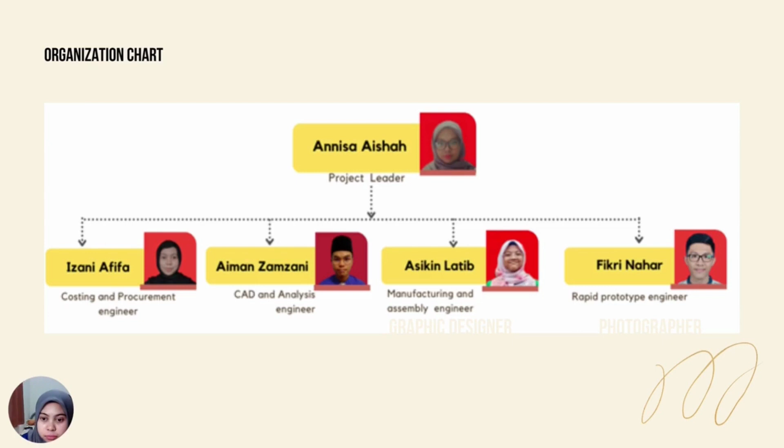And the time plan for our project is: meeting for profile company we're doing on week 5, discussion for project background and job distribution on week 6, design idea and process final selection on week 7, product development and evaluation on function and cost.

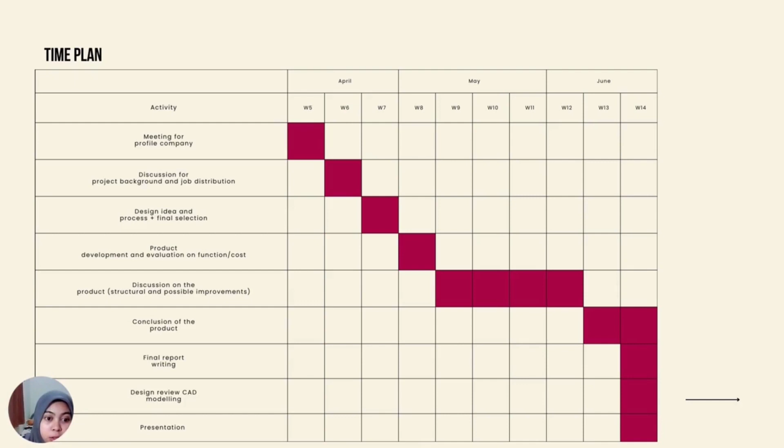For chapter 1, which is introduction and background theory, our project title is Enlil Wind Turbine. What is Enlil? Enlil is the first vertical smart wind turbine. It has been designed to both harvest the energy from the natural wind as well as those created by passing vehicles.

Objective of the project: the main objective of this project is to gain power from wind and reduce the amount of electricity generated from fossil fuel, resulting in lower total air pollution and carbon dioxide emission. Scope of the project focus: this project is comprised of improving the overall design and performance of the wind turbine, and making the best structure and ability of each component assembly.

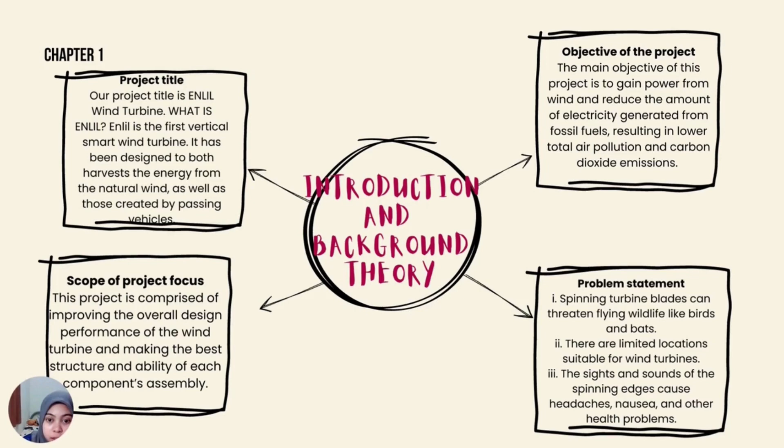Problem statement. First, spinning turbine blades can threaten flying wildlife like birds and bats. Second, there are limited locations suitable for wind turbines. Third, the sight and sound of the spinning blades cause headache, nausea, and other health problems.

Next, team member job scope. Annisa Aishah binti Roziman was planning the project, giving instructions to the team and making the project's budget. Nurul Izani Afifa managed the cost, schedule and quality.

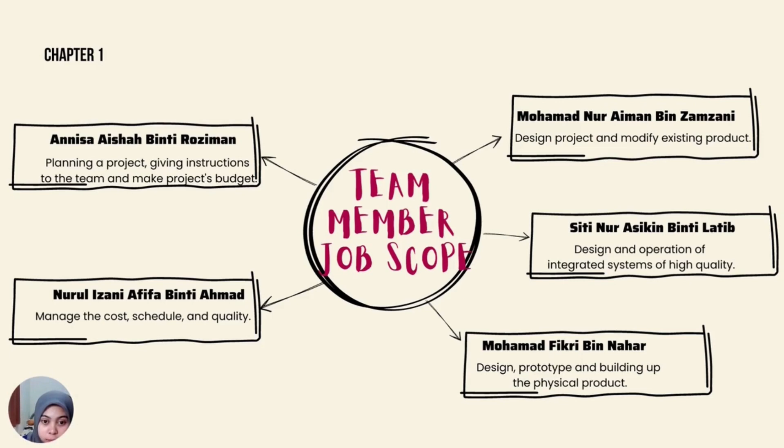Mohamad Nur Aiman bin Zamzani designed, projected and modified existing product. Siti Nur Asikin binti Latib handled design and operation of the integrated system of high quality. And lastly, Mohamad Fikri bin Nahar designed, prototyped and built up the physical product.

Explanation of the device. Wind turbines operate on a straightforward premise. A wind turbine rotates, utilizing wind power the opposite way a fan uses power to create wind. The propeller-like blades of a turbine are turned by wind around a rotor, which spins a generator.

The generator generates power. Enlil wind turbines are designed to gather energy from both natural wind and wind generated by passing automobiles. The aerodynamic force of the rotor blades, which are omnidirectional, converts wind energy into electricity in a wind turbine.

They don't need to be angled into the wind to work. The rotor is connected to the generator via a shaft and a set of gears, which speed up the rotation and allow the generator to be physically smaller. The conversion of aerodynamic force to generator rotation generates power.

Enlil is a vertical turbine that uses the dynamics of a modern city to harness one of the most important renewable energy sources, wind power. It is meant to capture the quick and continuous flow of traffic on a roadway in addition to the popularly recognized turbine.

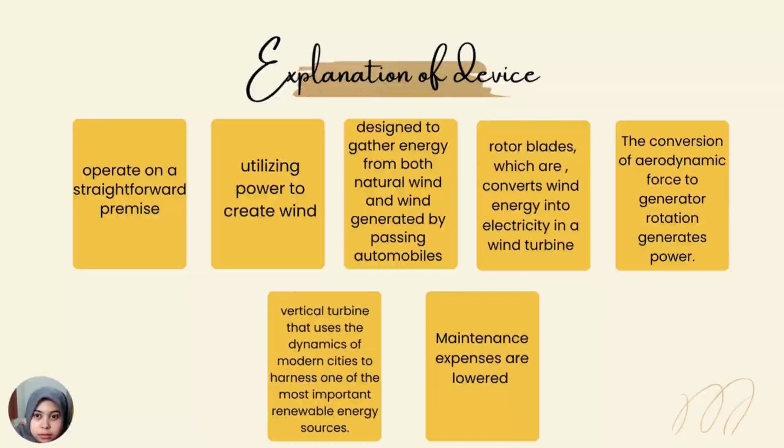The software that I use to design these components is SolidWorks. From the slide, you will see all of the components that we use in our product. Now I will describe our product components as well as their functions.

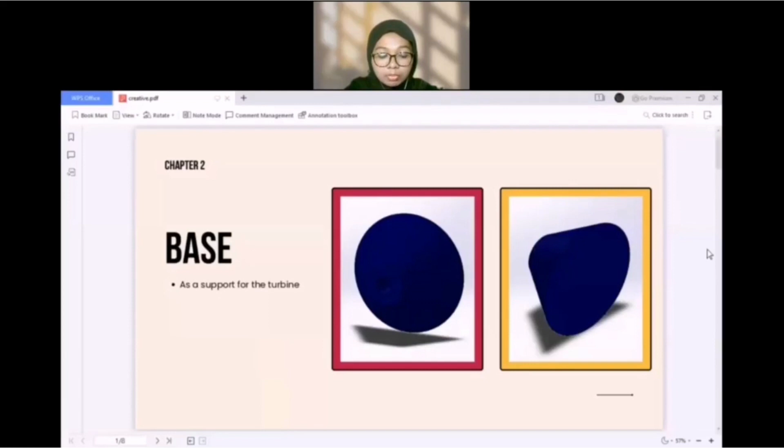The first component is the base. Bases were made to support all of the components of our wind turbine. All of the main components of the turbine will be located at the base.

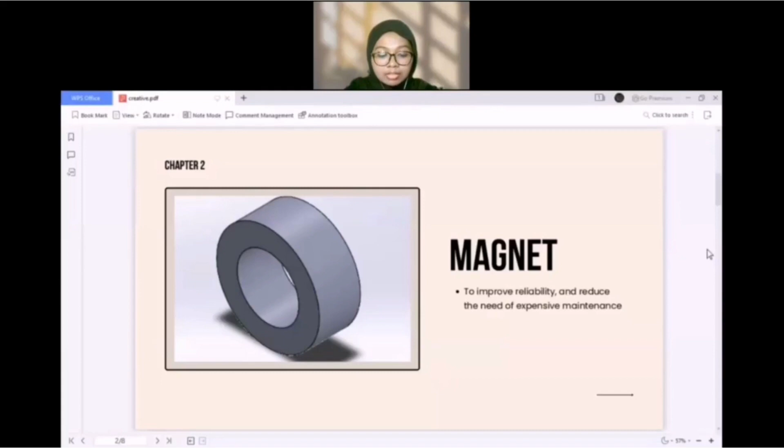Next is magnet. Magnet is made to improve reliability and reduce the need for expensive and ongoing maintenance. Magnet will also eliminate mechanical vibration as well as reducing noise.

The third component is rotor blades. Its function is to provide lift as the blades rotate. It will absorb the kinetic power of the wind and convert the energy to rotary motion around a central hub.

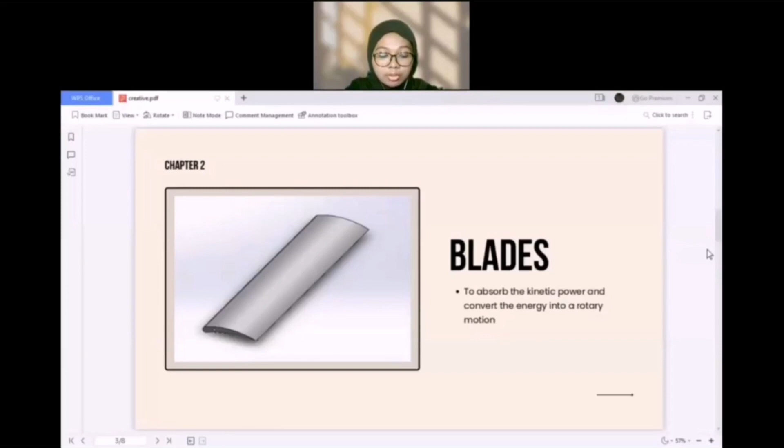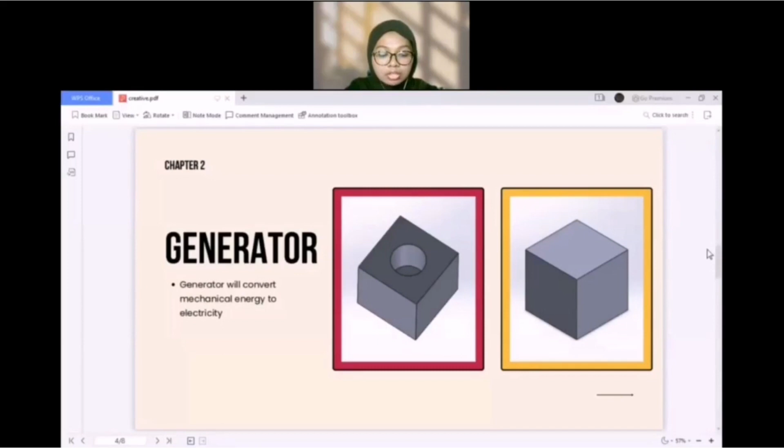Next is the generator that will convert mechanical energy to electricity. The generator is housed at the top of a tower just behind the turbine rotor hub.

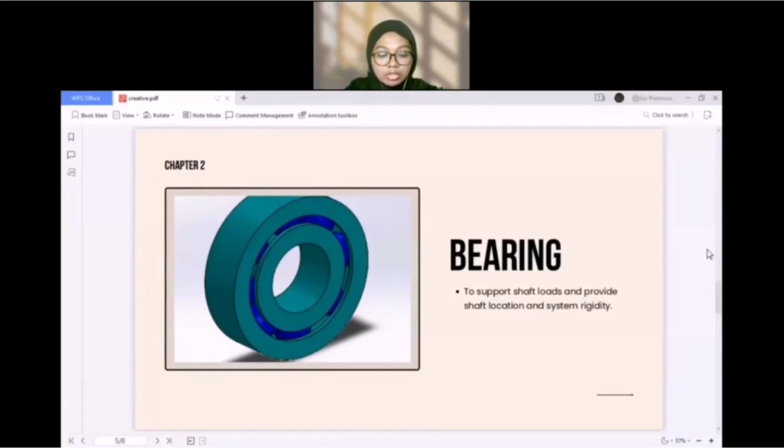The fifth component is bearing. Bearing is made to support shaft loads and reduce friction with rolling elements. Apart from bearing, we also made a bearing bracket, which supports the weight of the rotor. It also allows the turbine to spin freely and transmit torque to the generator.

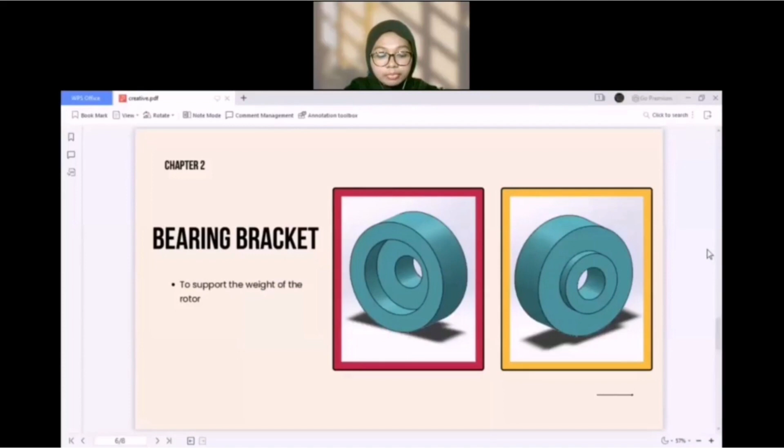Then we also have disc, which is to determine the optimum performance in the absence of blade drag.

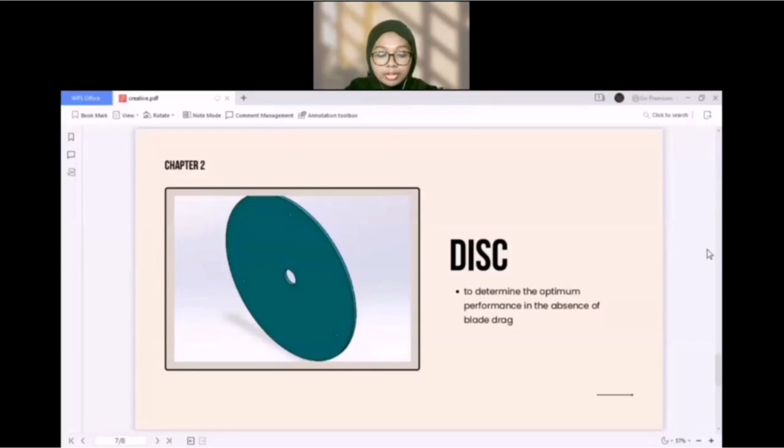The last component is shaft. Shaft is the section that is rotated by the turbine blades. The shaft is then linked to the generator located at the main housing.

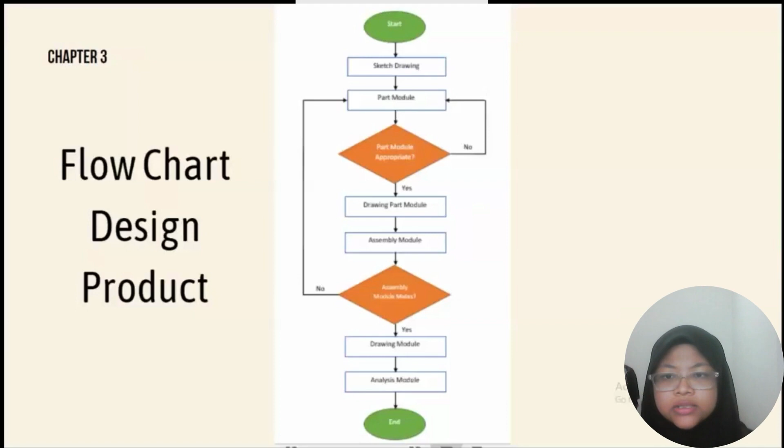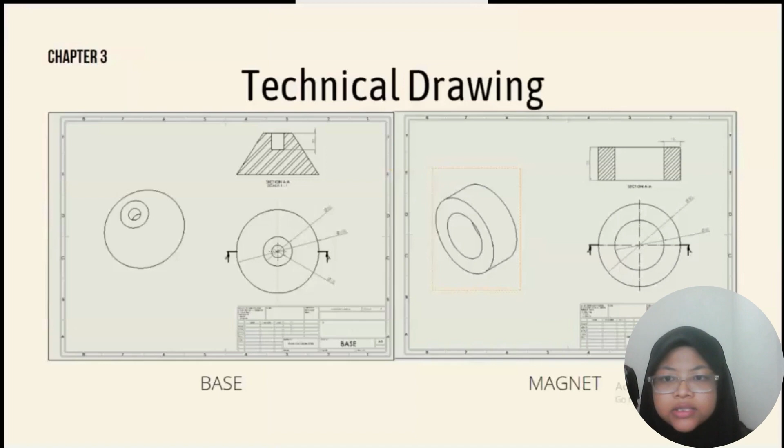Next is about the technical drawing and dimensions for each part. As you can see on the slide, there's the technical drawing for each part of the wind turbine, such as base, magnet, blade, generator, bearing bracket, disc and shaft.

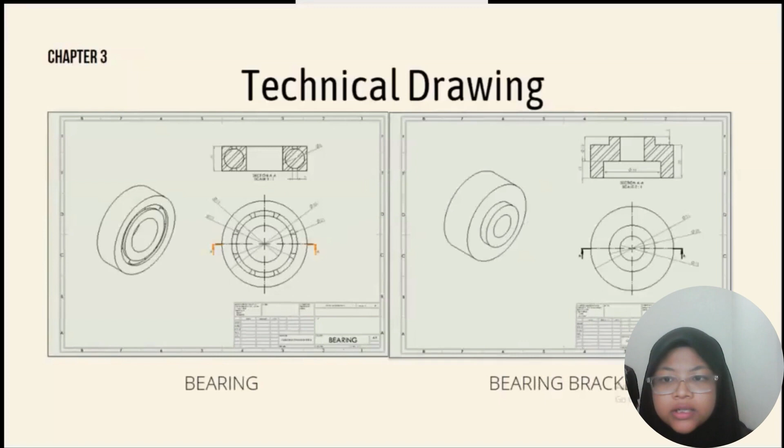Each drawing includes the dimension and the material of each part, which you can see on the report. Next is the drawing for the assembly, with material selection and bill of material.

On the slide you can see I already put the number for each of the parts. Number one we have base and the material is plain carbon steel. And for the bearing we set it as chrome stainless steel.

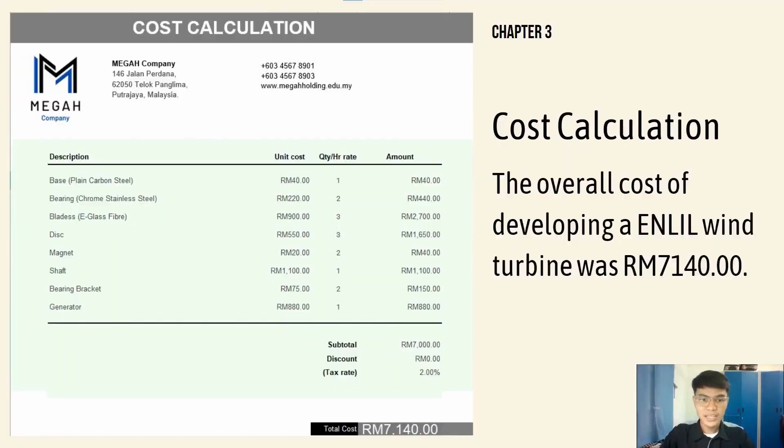I'm going to discuss the structural analysis result. After doing the simulation in SolidWorks, one of the structural analysis results we got is von Mises. The maximum von Mises value is 1.74 times 10 to the power of 6 Newton over meter squared, found at the center of the top and bottom disc.

This indicates that the middle part of each disc experiences a higher level of stress than other parts, due to the torque applied, which is caused by the wind force.

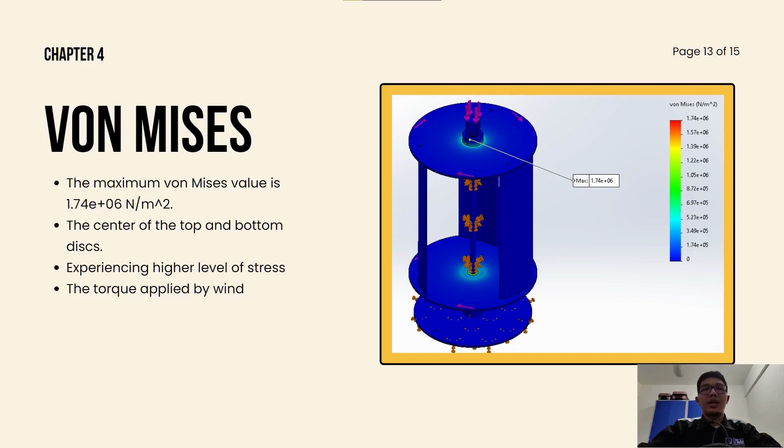The second structural analysis we did is the displacement. The displacement can be shown by the colored region when simulating the assembly part. The red region indicates the maximum displacement value of 0.001294 mm from the initial state, which is experienced by the parts.

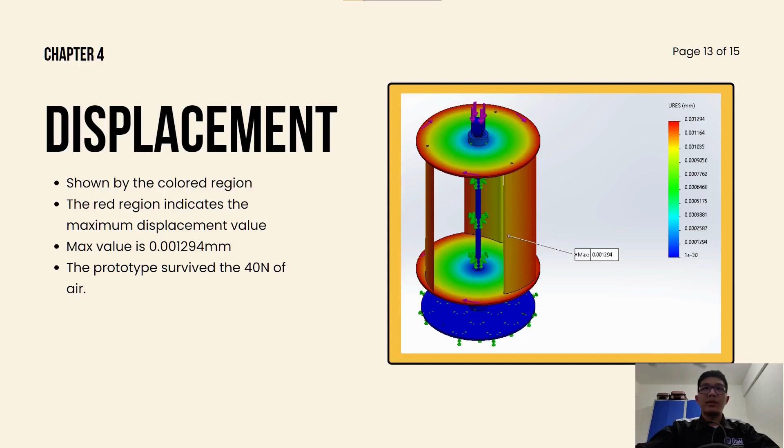As shown by the simulation, the prototype survived the 40 Newton of air. For the third part of the structural analysis, we look into the deformation.

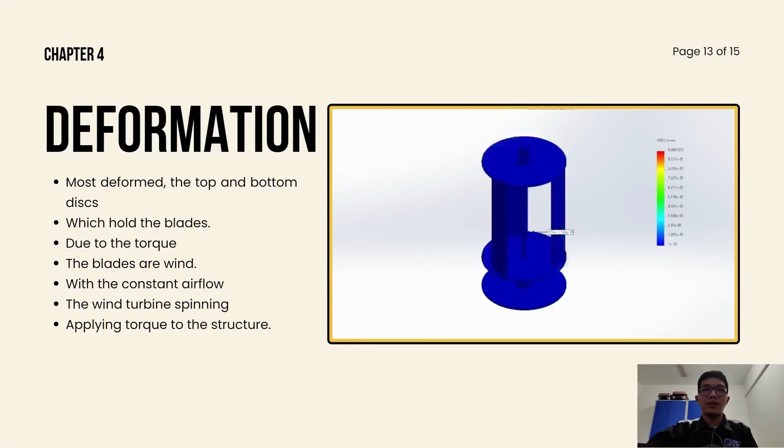As shown by the video, the parts that are most deformed are the top and bottom discs, which hold the blades. This is due to the torque applied when the blades are pushed by the kinetic energy of the wind. With constant airflow and the help of bearings, the wind turbine keeps spinning while applying torque on the structure.

After we finished the structural analysis, we calculated the factor of safety. The part that sustains the most stress is the disc, so we find the yield stress of the disc, which is 240 megapascal.

By using the formula factor of safety equals yield stress over max von Mises stress, we calculated and got the factor of safety, which is 137.93. In conclusion, the material will not fail even after applying the wind force of 40 Newton.

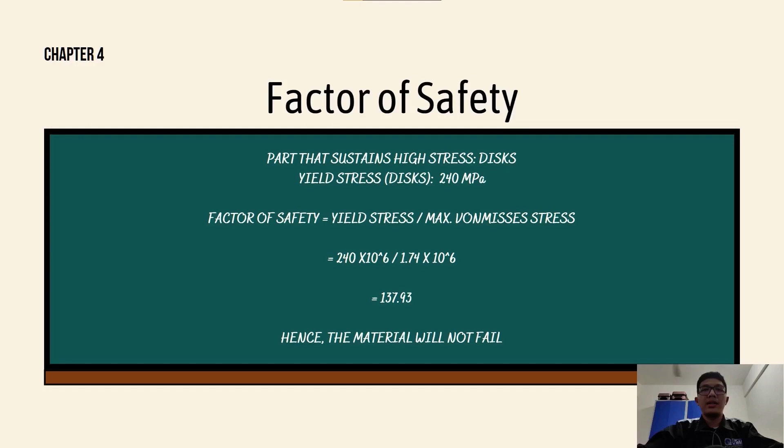Next, I will proceed to techniques to improve design failure during analysis. The first one is fixtures on the most bottom disc. Second, using the predefined material. And the last one is apply force only to the necessary part.

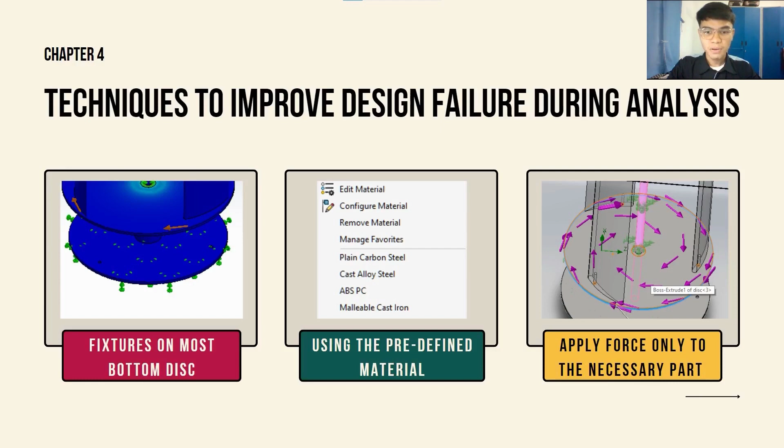Next, I will discuss ideas to improve the device. The Enlil wind turbine project that was completed contains flaws and weaknesses of its own. As a result, various suggestions for improving this project have been made.

The first idea to improve the device is to thicken the disc. The density of a disc increases as it becomes thicker, so the disc has a stronger resistance to torque. As a result, more torque can be accommodated.

Next, you should utilize a material with a high elastic modulus. When a material has a higher percentage of elastic modulus, it has a lower chance of deforming.

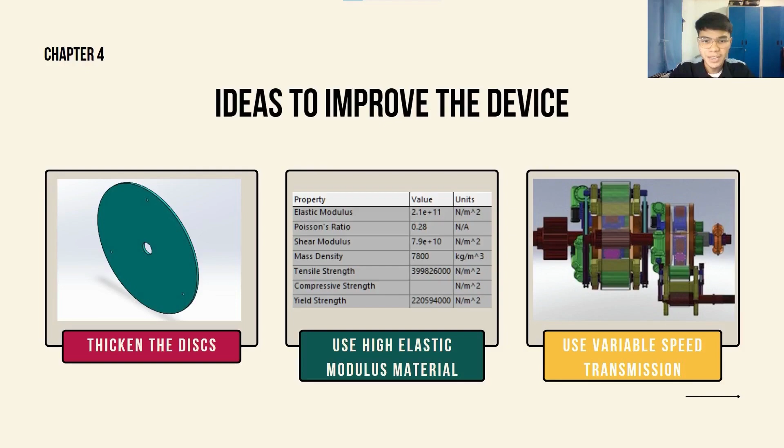Lastly, make use of variable speed transmission. Depending on the wind speed, this variable speed transmission will adjust the gear ratio from high to low or low to high. It can improve the turbine's efficiency, allowing it to keep spinning and generating energy continuously.

In conclusion, the Enlil wind turbine is a massive advantage for authorities. For example, Sri Lanka has a lot of problems soon due to the lack of non-renewable energy sources. Therefore, they are moving for renewable energy sources like wind, solar, rain, and sea wave.

So they can implement the Enlil wind turbine in every possible place and generate electricity while contributing to the reduction of CO2 production and economic growth. Therefore, this project is a green energy source that does not affect the Earth's life.